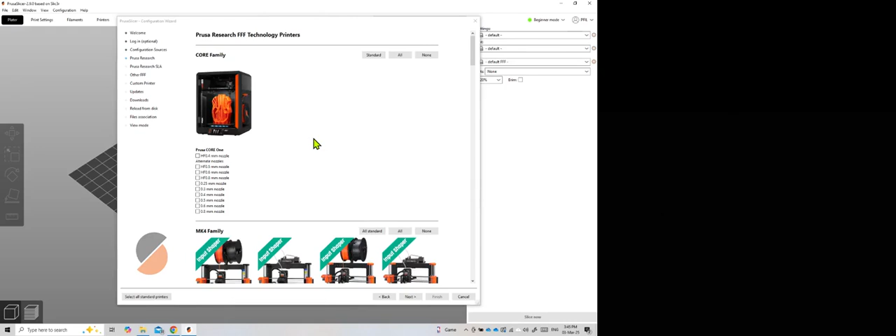All right, so then it's asking for the Prusa printers that we're going to be using with the slicer. We're going to look at the MK4 family, and the Minis, and I believe we also have the XL multi-tool. So we're going to take a look at those and load them into our system here.

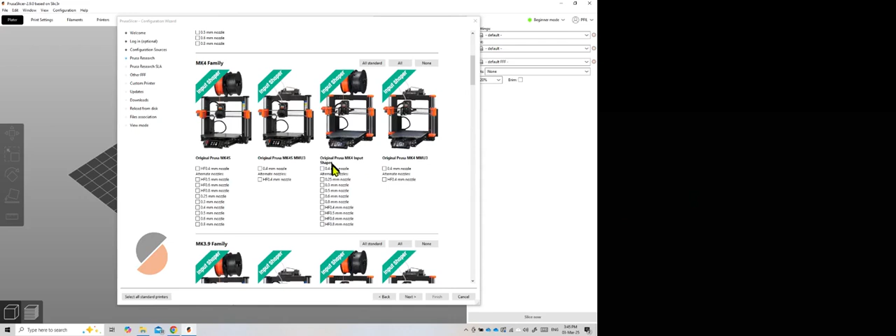For the MK4S, we do have the MK4 input shaper, so this is the one that we want. I believe we have the default 0.4 millimeter nozzle, so we're going to check that. We can always come back in here and add some of the other options as well.

Then we're going to skip down to the Mini, and we have the original Mini and Mini Plus input shaper. Same thing, default nozzle, which is 0.4 millimeters.

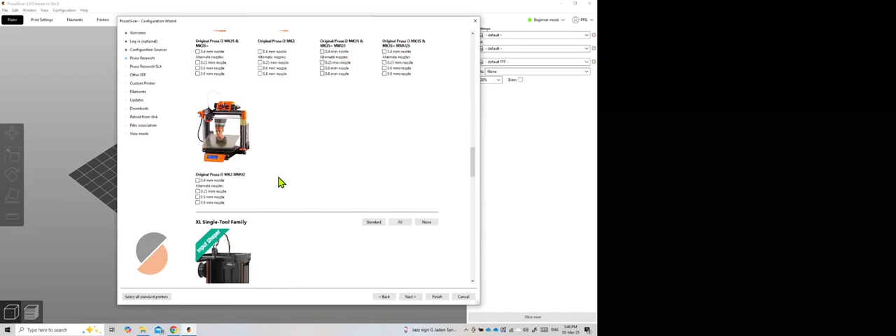And we're going to skip down to the XL multi-tool, and we're going to use the 5T input shaper, again with a 0.4 nozzle. Unless anything else changes, we can swap those nozzle options and add those in. But those are the three printers that we have in the makerspace.

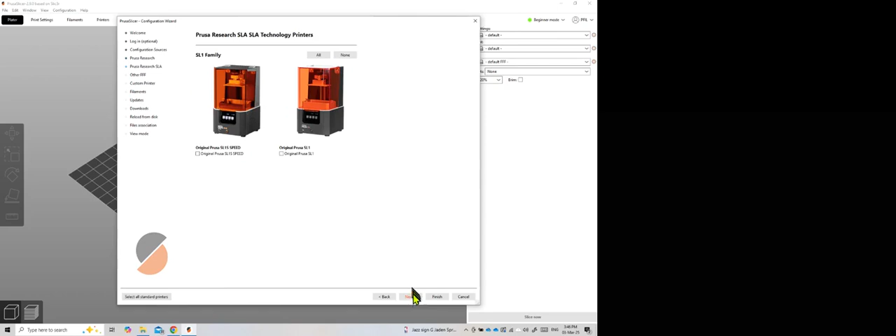So I'm going to click next. We don't have any of the SLA technology printers, so I'm just going to skip past that by hitting next.

And any other vendors that we may have to support the Prusa Slicer, so I'm just going to scroll through here. I think this is basically the other printer companies that the Prusa Slicer will work with. So if you have a Ultimaker 3D printer or any one of these other ones, you can go ahead and check those, but I'm going to skip that and say next.

Custom printer setup - we don't have a custom printer setup, so again we're going to skip. And filaments - so the printer.

So for all of the Prusa printers, the type - the type of filament. There are a lot of different types of filament options, different types of plastics, if you will, not all entirely plastics, but mostly plastics. For the most part, we have three types: PLA, some PETG. I don't think we have ABS, but this could be another option. I'm not seeing some of the other types that we might use, but pretty much we have PLA and PETG in the lab.

So for PLA, for the most part, that's what we're going to be looking for. Do we want to include all the vendors? I believe that we have Printed Solid, and that is the vendor that we have in the makerspace, and we're going to set it to the Jessie PLA, which is the brand name of the filament - this is the spool of plastic filament. So is the Jessie PLA made by Printed Solid, and that is the type. So we're going to say next.

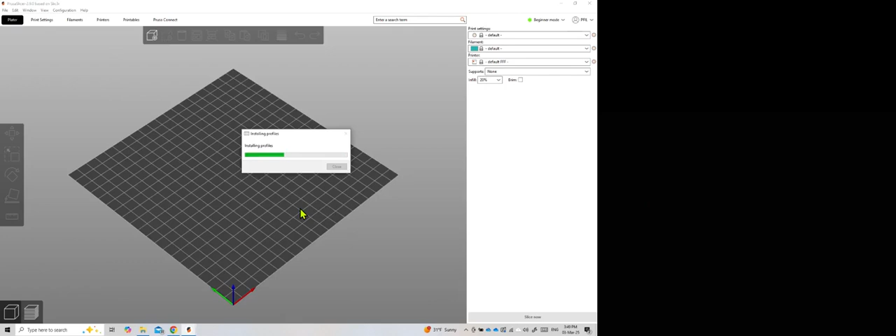Let that do its job.

Okay, so this is our current window, and first thing we're going to do is you'll notice that up top it has these tabs. The various tabs is the plater, which is basically the plate, the print settings, the type of filaments that you're using, the printers, printables.

That's a shortcut to the website where you can download instead of creating your own designs. You can download from printables.

And then Prusa Connect. If you have internet capabilities between your phone or your computer and the printer, you can print directly from your phone. You can have a camera connected, and you can have it watch. You can have all these things connected from your computer to a live printer view, if you will. So if you're not ready to start a print, you can come home, connect through the Prusa Connect, and start your print from your phone away from campus.

But we don't have that connected as of right now. So, all right, first thing we're going to do, we're going to import or add an STL file. So I'm going to go ahead and go into my downloads folder.

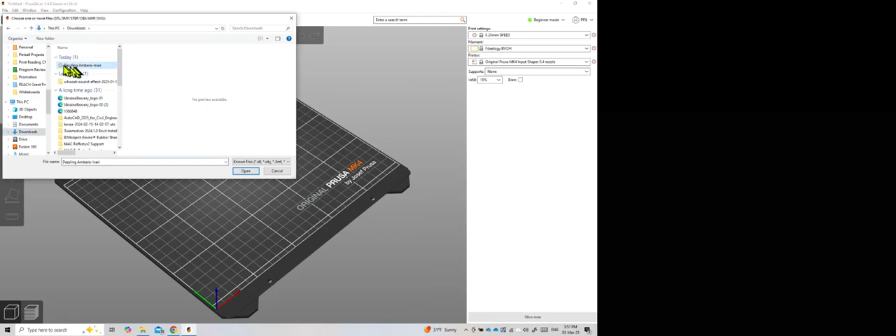There we are. And this is, it's a different name, but this is the coin. So I'm going to open up that coin, and it's going to load it in. And you can see using the scroll wheel, we'll zoom in and out. If I press the left mouse button and move my mouse, I can orbit around.

And so right now we want to set the plate. This does say MK4, so it looks like it's set to our MK4. So these are our settings. The printer we're using is the MK4 input shaper with our nozzle type. If it's something else, then we can go ahead and use the drop down and switch.

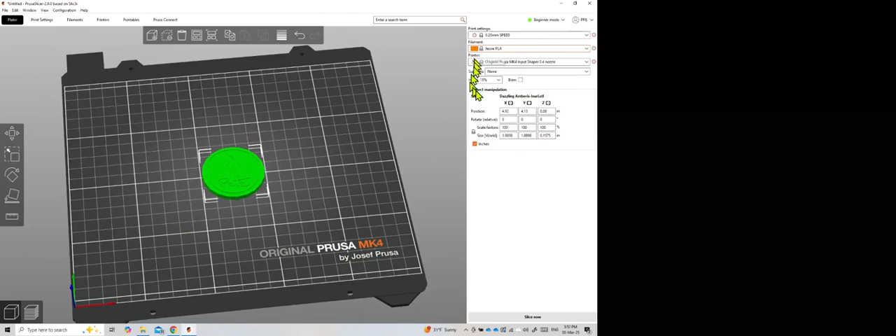And these are the preloads that we chose beforehand, the filament that we're using. So we're using the Jessie PLA, so we just want to go ahead and click on Jessie PLA. It does have an orange color to it, so we can change this depending on if you're using different types of filaments.

And then the print speed setting, you can basically dictate whether or not you want higher resolution, lower resolution, slow speed, fast speed. So these are some of the things that you can change. So we're just going to keep it at the 0.20 millimeter speed.

Supports. If you don't know too much about 3D printing, you probably want to go ahead and always put supports, supports everywhere, and it will generate supports if it's necessary.

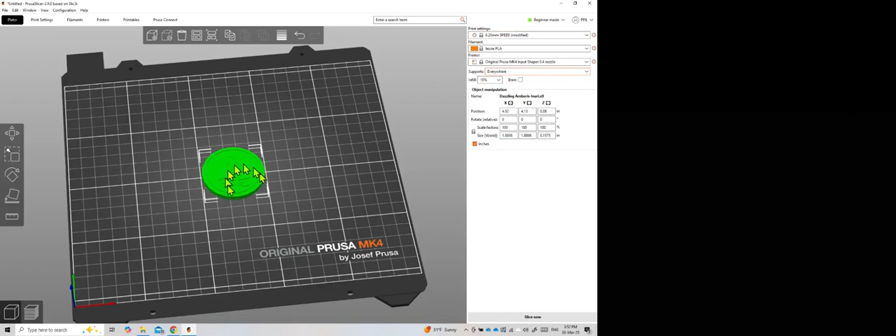The infill is how much internal material, so it doesn't actually print solid, but it typically prints with some sort of honeycomb shape or a grid shape on the inside to make printing faster. So obviously if you go 100%, it's going to be a solid model. Typically we go anywhere between 20 to 30% depending on what it is that we are creating. So I'll leave that at 20% infill.

The brim we don't have to worry about too much right now. And just a couple of options here. We do have these little shortcut menus that allow you to move your product, but I can just left click on my coin and I can just move it that way.

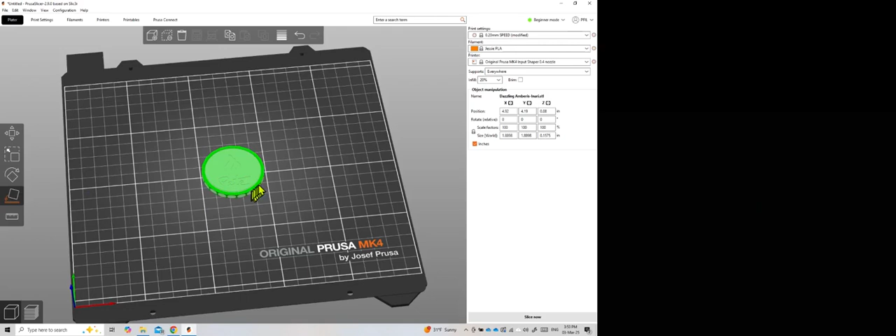I can scale it if I need to scale it. I can rotate it. So if it needs to be rotated, I can rotate it. And place on face. So this is an important little button depending on how you want to organize your plate. It'll recognize flat places or places that it can be placed. And if I needed to stand it up for whatever reason, I can stand it up and I can print it this way.

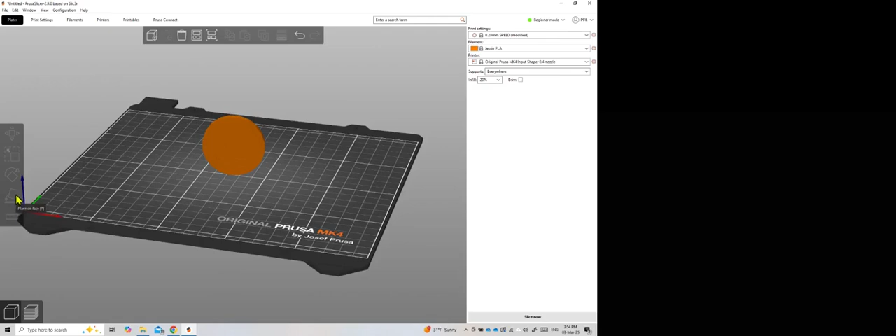Now, if I did print it this way, you have problems here underneath. So probably supports would be a good idea so that the coin doesn't have these overhangs and it could print properly. But I'm just going to go ahead, select my coin, and while I have it selected, I'm going to go ahead, place on face, and select the back.

And then we're good. Okay, so you do have other options up here. You can add additional models, you can delete the current model, you could arrange. So if you have several models on your build plate, you can hit arrange and it'll automatically arrange for you.

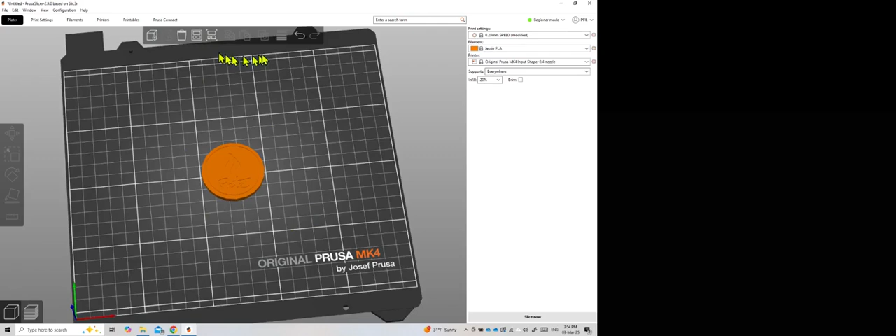That's really all you need on this window, on this part here. I'm going to try to move this out of the way a bit.

Other print settings, if you want to get down into the nitty gritty, it's a little scary and intimidating window. There's a lot of information, but you can really change the layer height, the vertical shells, the horizontal shells. There's a lot of other types of information in here.

The infill. Again, we set up the 20% grid pattern. The strongest pattern by far is the gyroid pattern, so if you want something very strong, the gyroid pattern is the way to go. Otherwise, you can pick any one of these. Some are more creative, others are more structural. But triangles and honeycomb are probably the standard, so I'm just going to stick with triangles.

Do we want specific patterns on the top or the bottom? Again, you can play with those.

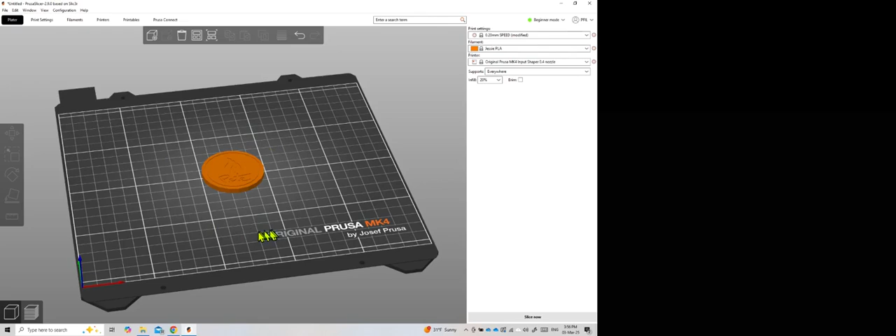Skirts and brims. There's also rafts. This will put an extra print around your item, and it'll essentially skirt it. That allows the nozzle to go ahead and print a layer and get used to printing before it actually prints the object itself. So something to consider there.

Support material - obviously generate support material. Yes, we want that checked on just in case there's something we might miss, but you don't have to.

Filaments - we already have filaments set up, but we can fine tune the temperature of the nozzle, cooling, keeping the fan always on or not, filament overrides, a lot of different settings in here to really customize general settings, any extruder details, dependencies, and so on.

So for the coin, the only thing you really need to worry about is: Prusa PLA, MK4 input shaper, put supports everywhere, infill at 20%, and make sure that it's lying down. You shouldn't have to worry about anything else that's up here.

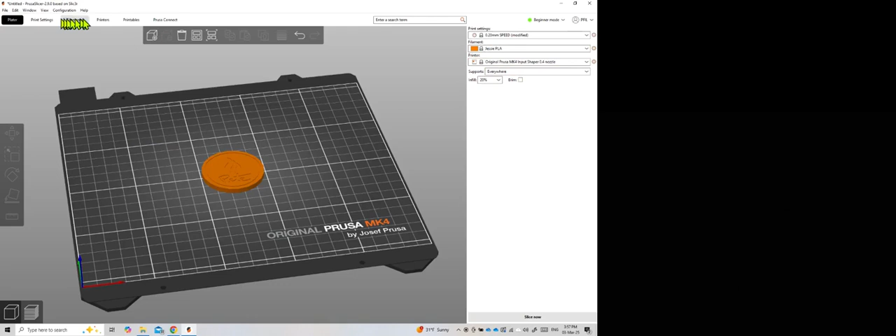All right, then we're going to slice. So we're going to go down to the bottom right, click Slice Now. Okay, and then this is our sliced coin.

So we've got a window with a couple different colors representing the time and the percentage and the usage of filament. Basically, anything that is yellow is a perimeter print. Orange is the external perimeter print. The red or dark red is an internal fill print. So it kind of separates everything into the type of print that it is.

It's also going to show you that it's going to take 2 minutes to do the first layer, and the total coin will be about 13 minutes long, from start to finish.

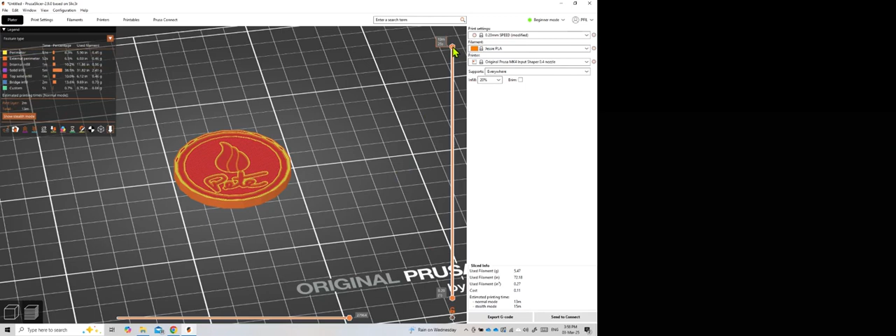And then on the right-hand side, we have a layer meter, basically. If I go ahead and click on the top, this is after 13 minutes, so I can drag this slider down and it's going to show all the different layers - layer 16, layer 15 - and you can start to see the triangle pattern on the inside there. Layer 13, layer 12. So this is how the coin is being built layer by layer.

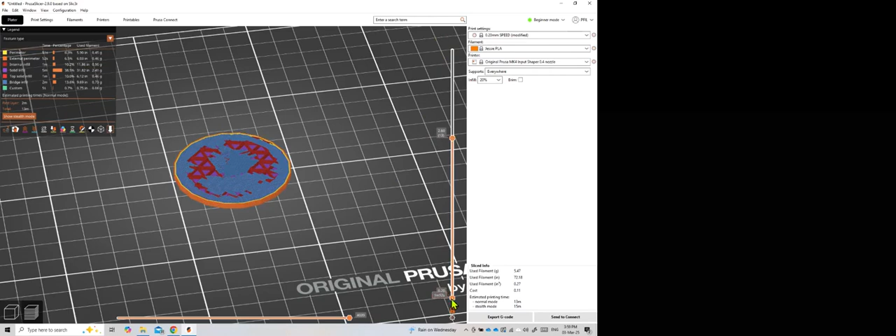If I wanted to, I can also move the bottom and really dissect a certain layer and see how that layer is being utilized from either side. So this is the layers option.

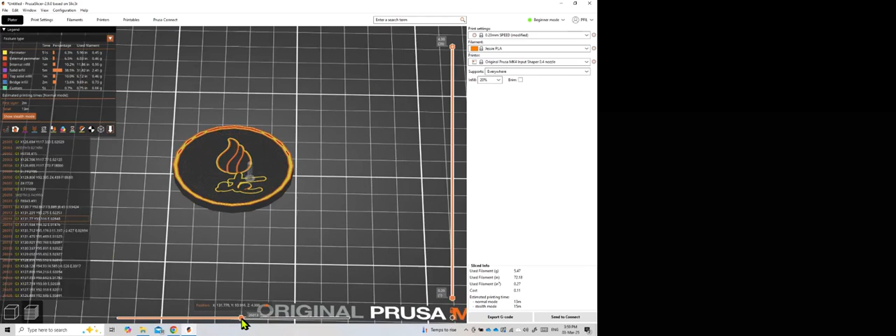On the bottom, we also have the toolpath, so we can see exactly the toolpath that is being created by the Prusa Slicer. And you'll notice on the left-hand side here, this is the G-code - these are the sets of instructions given to the 3D printer to create this print. So you can see exactly what order it is.

You can go in here and change the code if you know what you're doing, and you can basically force the code to order it to stop in a particular spot and pause. Maybe you can insert something - I know people have inserted magnets inside their prints and then continued. So there's a lot of other things you can do creatively.

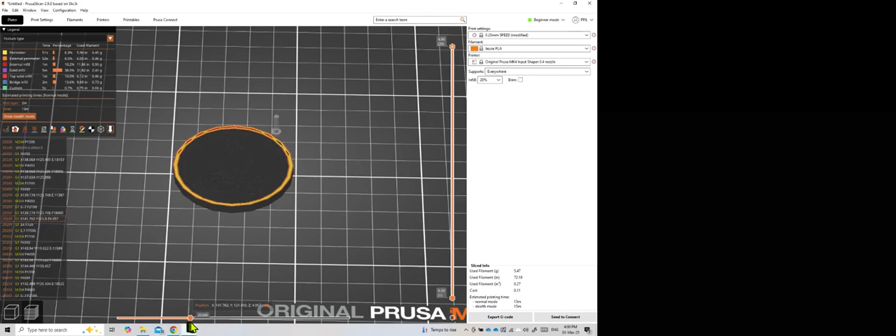So this is building the print in 3D, and that's the finished spot. If you don't like it, you can click back down here and try flipping it around, change some settings. If you don't mind it, then you can go back into the sliced environment, and essentially we're just going to say export G-code.

It'll tell you you're going to use about 5.5 grams of filament, how many cubic inches of filament, and the rough cost - about 11 cents to make this coin. And of course, how much time. So we're going to export the G-code.

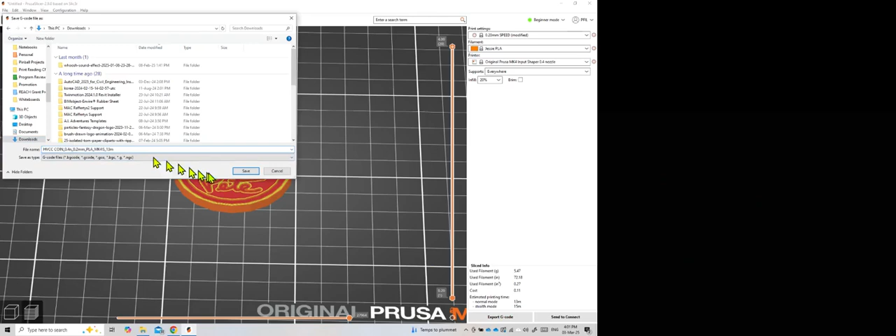And I'm just going to put it into my downloads. I'm going to call this the coin - HVCC coin. And it's just giving the information, the MK4 nozzle, 0.2 millimeter, PLA, 13 minutes. It just gives you a rough name, that's how it's naming it. And you've got your G-code here.

File types - hit save. It's just going to ensure that you're running the latest firmware, so click OK. And it'll give you a little export finished message. Open the folder, and this is what you're going to send to your USB stick. And that USB stick you're going to throw onto the printer, onto the 3D printer itself, and start your print.